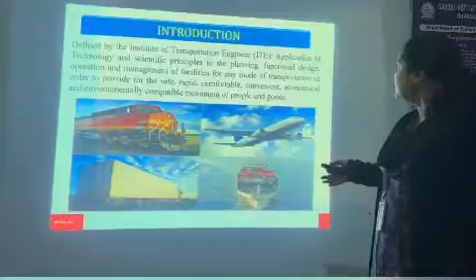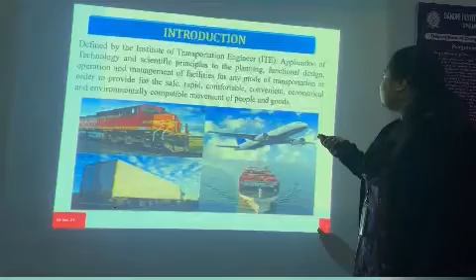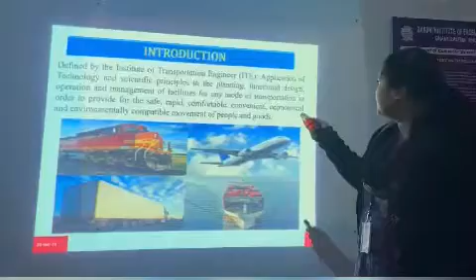Before going into the topic of highway engineering, let's see what is transportation engineering, because highway engineering belongs to a part of transportation engineering. This is the definition given by the ITE, the Institute of Transportation Engineers: the application of technology and scientific principles to the planning, functional design, operation and management of facilities. Transportation engineering deals with the safe, rapid, comfortable, convenient, economical and environmentally compatible movement of people as well as goods.

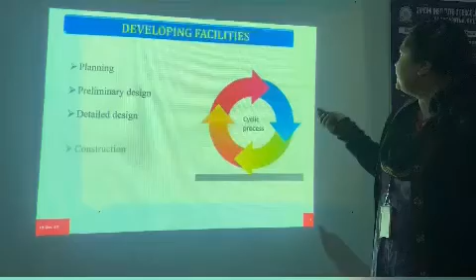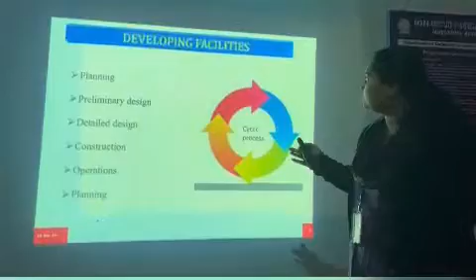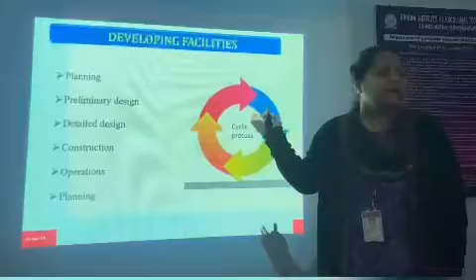For developing facilities, whenever we go for any type of construction process in any mode of transportation, these are the cyclic processes which always carry on: first we go for planning, then preliminary design, then detailed design, then construction, then operation, and then the planning process continues again. So this is the cyclic process shown in the diagram, which always continues whenever we try to design or construct any new transportation mode or highway.

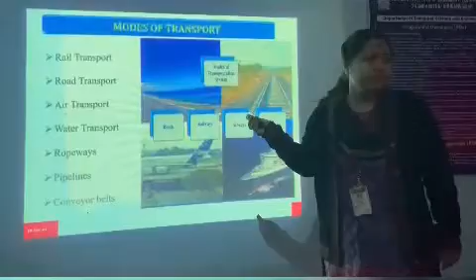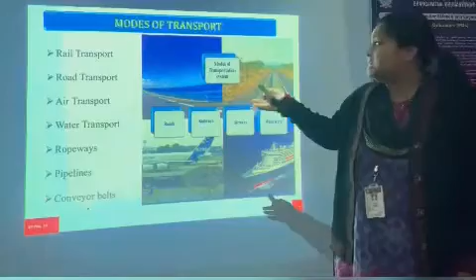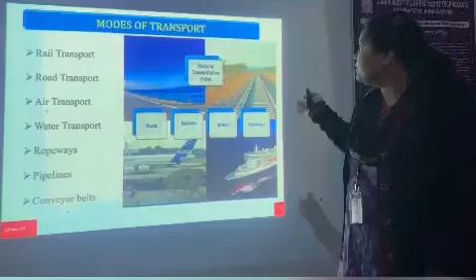Now these are the various modes of transportation. You might have seen everywhere, whenever you step out of your house, that there is rail transport, road transport, air transport, water transport, ropeway, pipelines, conveyor belt. We will read each point one by one, but for now our topic is highway transportation, or highway engineering. So our basic focus will be on highway engineering.

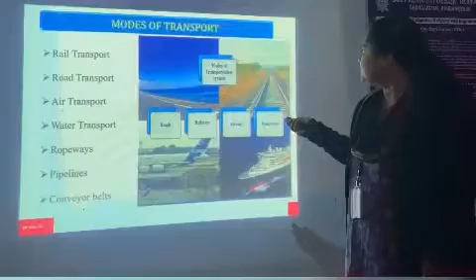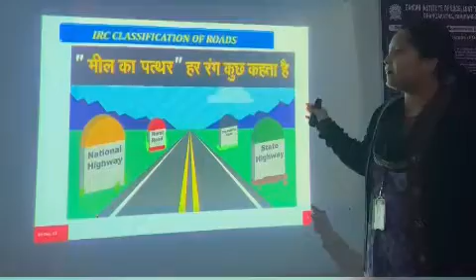Before he joined, the road network being made was generally 2 km per day. In his very first year, it was just 2 km per day, which he increased to around 21 km per day in the second year, and now it has further increased. That means in one stretch, firstly they were making only 2 kilometers per day. Now that has changed to 21 kilometers, and presently it has increased a lot more. You might have seen the road networks increasing day by day.

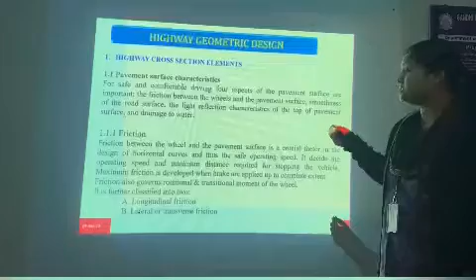On that note, we will learn about 2 classifications of friction: longitudinal friction, as mentioned below, and the other one is lateral or transverse friction. So the first one is...